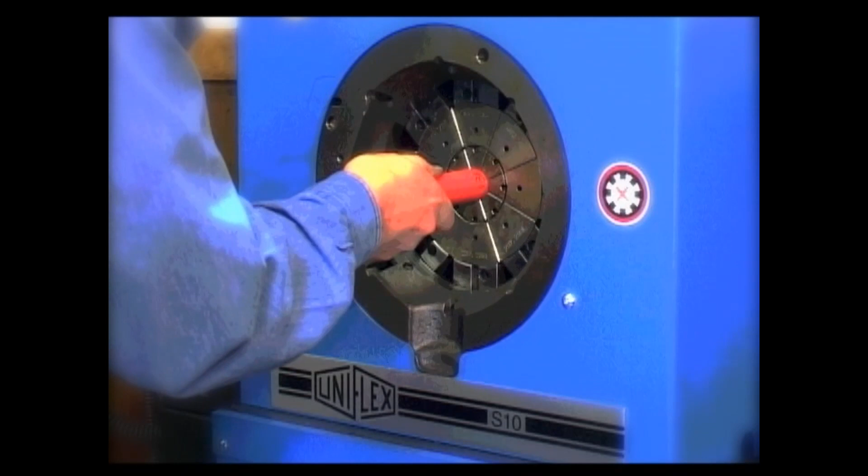As you're well aware, the use of ferrules and sleeves as an attachment method for industrial hose is becoming very popular, in great part due to the success of our Crimpnology program. Crimpnology is a term that we came up with to simply describe all of the technology involved in crimping: the design of the fittings, the ferrules, the sleeves, and the processes to put it all together.

This short video is going to show you how very simple those processes are, and that by using those processes, you can build a repeatable, measurable, performance-oriented hose system as opposed to a hose assembly.

Let me introduce you to some of the people that are going to help us with this video. Jeff Craig is Campbell's Vice President of Sales and Marketing, and he's going to describe some of the features of hose systems. Our hose systems specialist, Titus Jumper, is going to walk you through the actual process of crimping by crimping several assemblies. And Dave Riley is going to show you some special situations you may run into while crimping. Dave is in inside sales, and we like to call him the crimp doctor because he's available to you 8 hours a day, 5 days a week with any of your crimp questions. Let's get started with Jeff.

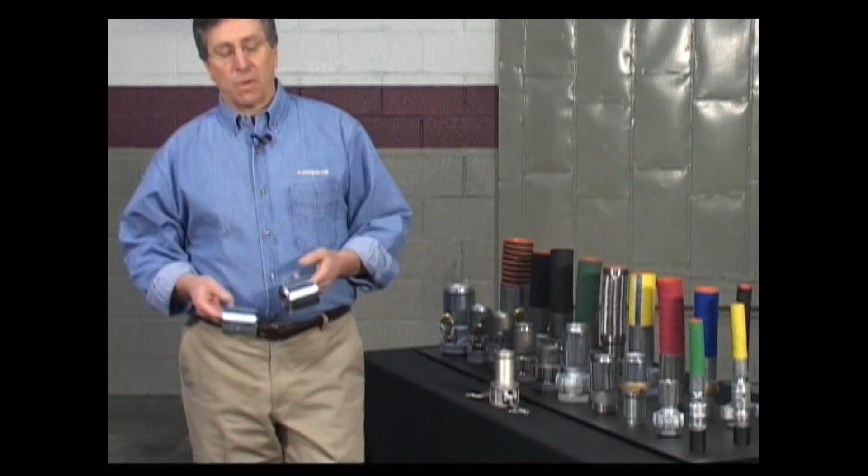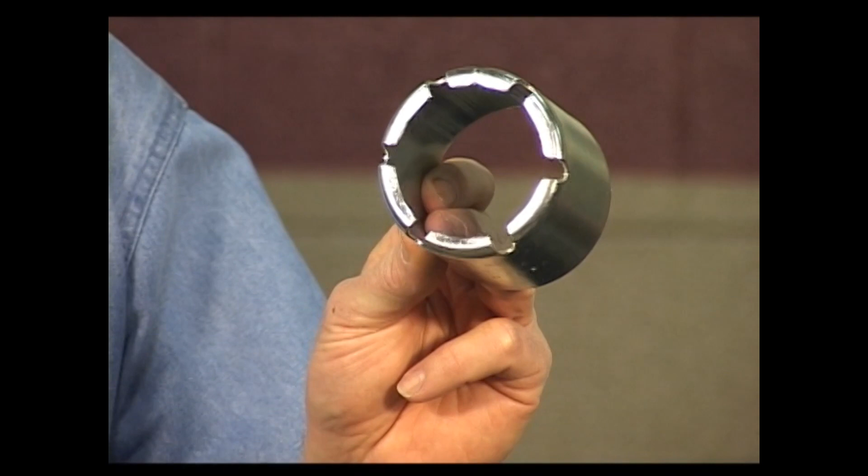There are three basic elements to a hose system: ferrules and sleeves, fittings, and the hose. Let's start with the ferrules and sleeves. The sleeve is basically just a piece of tube. It's cut to length and sized. A ferrule is just really a sleeve with an attitude. It's got a turn-in at the end and slots. Now that turn-in allows the ferrule to grab a hold of the interlocking collar on the fitting and make a mechanical interlock. The cutouts here just really allow the metal to flow as the crimper comes down on it.

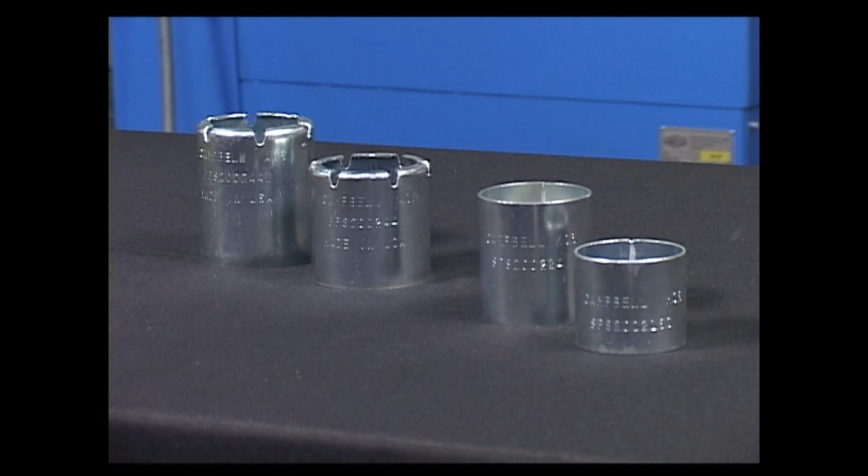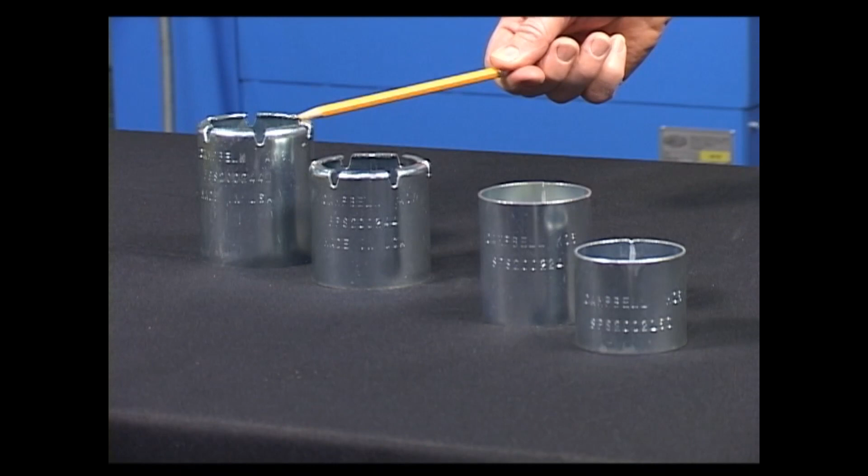The important thing is that whether it's a sleeve or a ferrule, it has to be compatible with the shank on the fitting. In Crimpnology, there are a lot of different sizes of ferrules and sleeves, but only two basic lengths. We have a standard ferrule and a long, a standard sleeve and a short. The length of the sleeve or ferrule should match the shank length of the fitting.

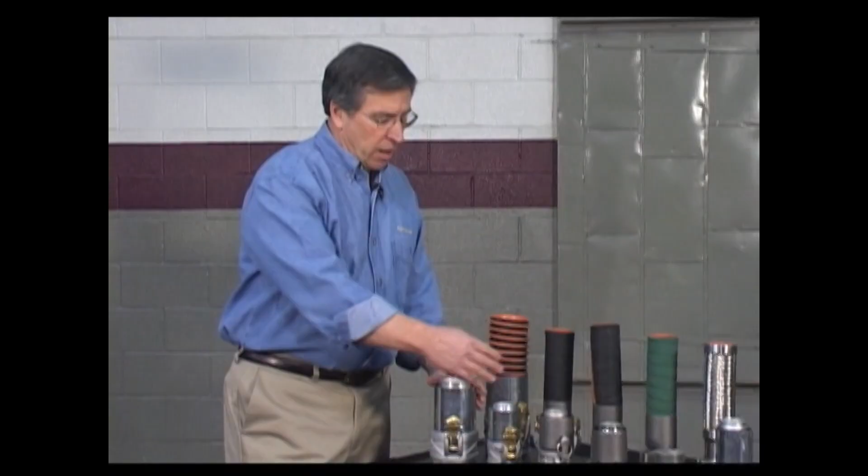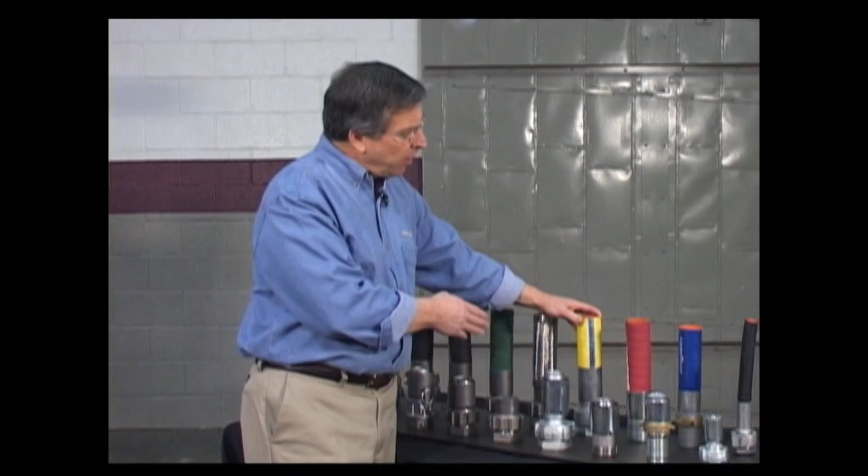When we get down here, we've got a ground joint coupling crimped to a 1,000-pound air hose. Higher pressures, higher temperatures, hence a longer shank, a longer ferrule. At the other end of the fitting food chain, we've got a suction hose coupling, low pressures, low temperatures. We use a short shank and a short sleeve.

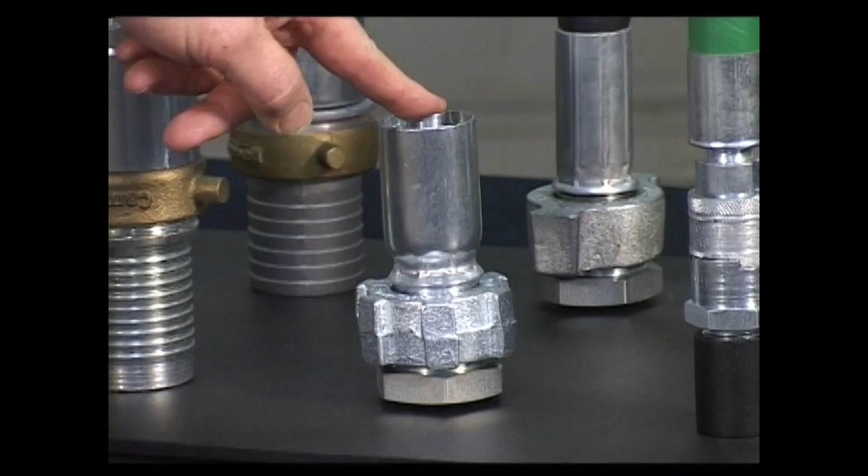Now this is a whole different animal. It's a crimp steam hose coupling. Because of the high temperatures and high pressures, plus the thermocycling that they operate under, we designed each of these around a very specific manufacturer's steam hose. And here we have the light duty ferrules that are designed around utility hose such as water, air, and nitrogen.

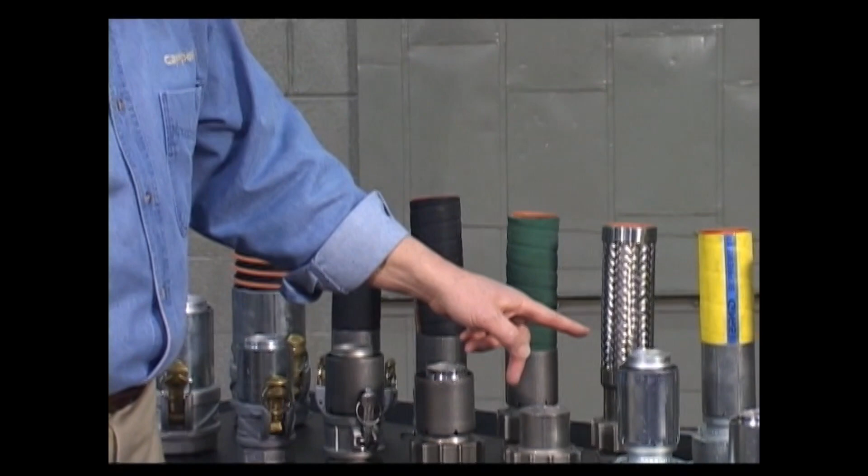Now one thing you'll notice as you look at these, in each case, the shank of the fitting stands just a little bit proud of the ferrule or sleeve. We do that on purpose. When you crimp, the material in the ferrule or sleeve will stretch slightly, and we allow for that so it grows to be the exact length of the shank.

One more thing. Let me illustrate what happens when you use an incorrect length of ferrule or sleeve on a fitting. What I'm going to do is take the long ferrule, put it on a shorter shank, and a short ferrule on a longer shank. Now in neither case is the hose correctly supported. In this scenario, as the hose moves, because the tube's not supported, it's going to wear on the tube, and that can result in premature tube wear and even a failure.

In this scenario, exactly the opposite. Now the cover's not correctly supported, so as the hose flexes, it allows the ferrule or sleeve to cut into the cover. That can result in premature wear of the cover, or again, a failure. It's critical that the ferrule or sleeve and the shank are compatible.

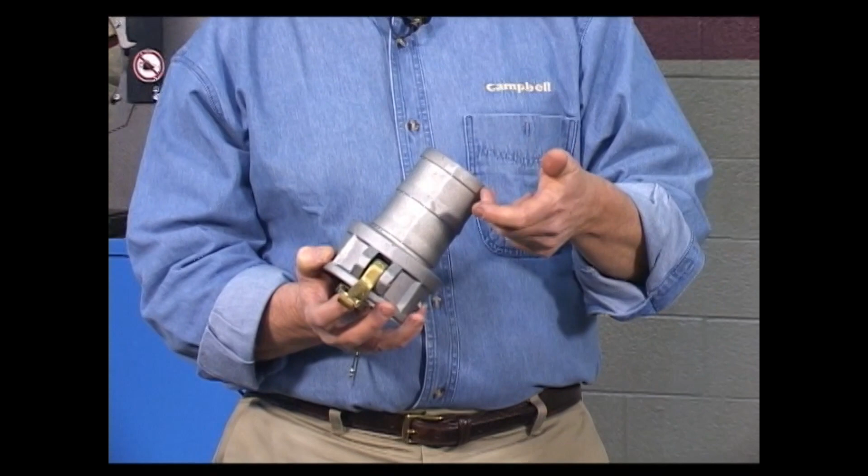Just as length of ferrule and sleeve is critical, so is shank design. This is a classic two-bump shank, designed to be used with band clamps. The two bumps locate a clamp in the center, the clamp at the end of the shank. Good for clamping, but less than ideal for crimping.

Why? When you crimp a ferrule or sleeve down on this shank design, most of your pressure is exerted on only two areas. It's a 3-inch shank, but there's only 1 inch of raised portion, and that's where the pressure is exerted. It can cause 3 problems. The first could potentially damage the tube. The second is sealing issues, and the third is hose retention.

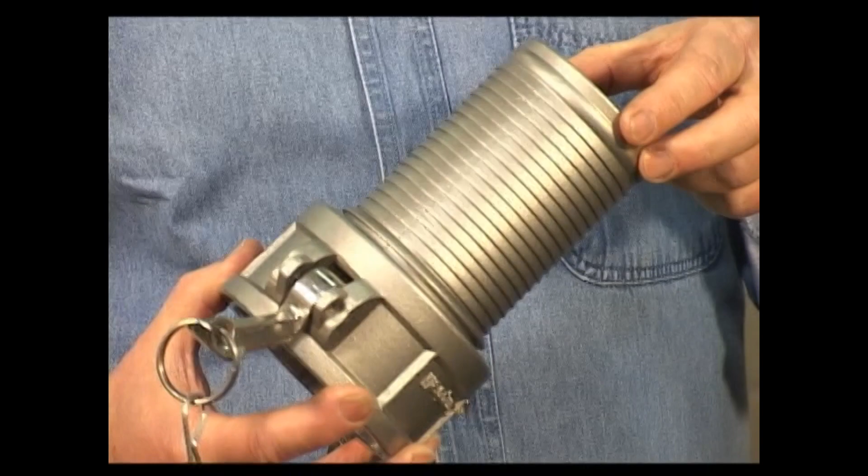The ideal shank for crimping has multiple serrations, all the same height. This allows the ferrule or sleeve to exert its pressure evenly over the entire shank, which is ideal for both retention and sealing, and also doesn't prematurely wear the tube.

Jeff described the first 2 elements of Crimpnology, the design and manufacture of our fittings, ferrules, and sleeves, all of which we can control. I'm going to describe the third element, the hose. The hose is the only element we cannot control. As you know, industrial hose has many shapes and sizes, which create issues when it comes to crimping. Given this, how do you establish a safe and accurate crimp specification each and every time you build a hose system? You use the Campbell Crimp chart.

Now there's 3 sections to the Campbell Crimp chart: the table of contents, a procedure section, and finally the spec charts themselves. In the procedure section, you're going to find a lot of important information about crimping, but I'm going to boil it down into 2 simple steps. Measure the hose and use the chart. Again, it's that simple. Now I'm going to get into a little more detail about those 2 steps.

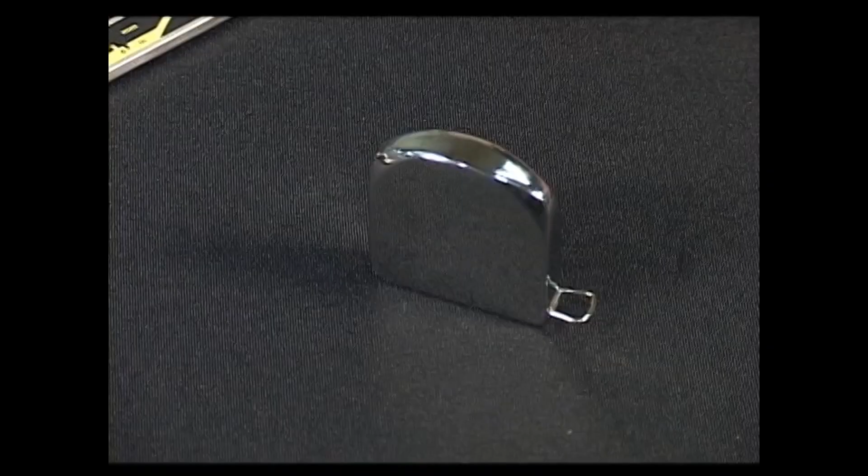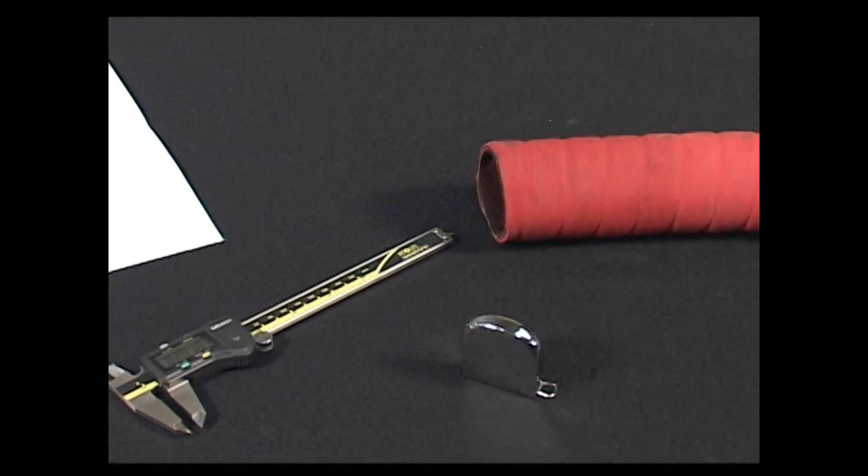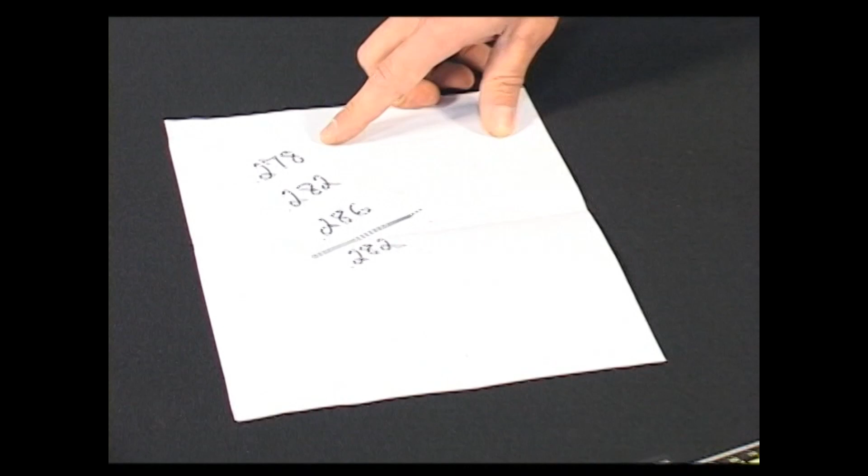You can measure the OD with a pi tape, or you can measure the hose wall with calipers. We suggest the hose wall method because it's more accurate, and we explain this later in our FAQ section. Industrial hose ODs can vary dramatically, so when measuring the wall, we suggest taking 2 or 3 simple measurements. In this case, our measurements came to 278, 282, and 286. Now in your head, come up with a rough average. In this case, it's easy. It's 282. Now let's go to the chart.

Here you're going to see an example of a page in our crimp chart. The highlighted section shows the couplings by name. This next section shows those same couplings by part number. In this column, you're going to see many of the different ferrules that are suggested. We took our hose wall measurements and came up with 0.282. Scrolling down this column, we're going to see that that number comes in between 2 different numbers, and that's okay. We're going to use 281, the closest number.

And here you'll see that we connected the column with the row to get our suggested ferrule. Just to the left, you're going to see our crimp diameter. So by taking the hose wall measurement and using this chart, we've identified both the ferrule and the crimp diameter. So now let's crimp some hose.

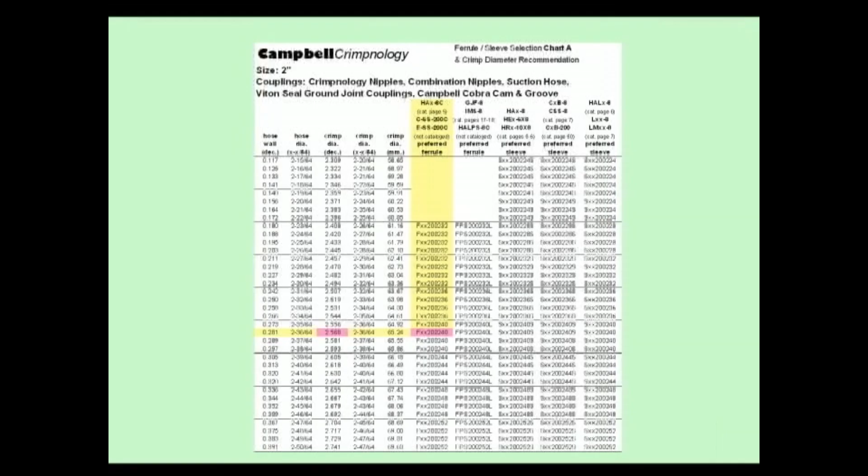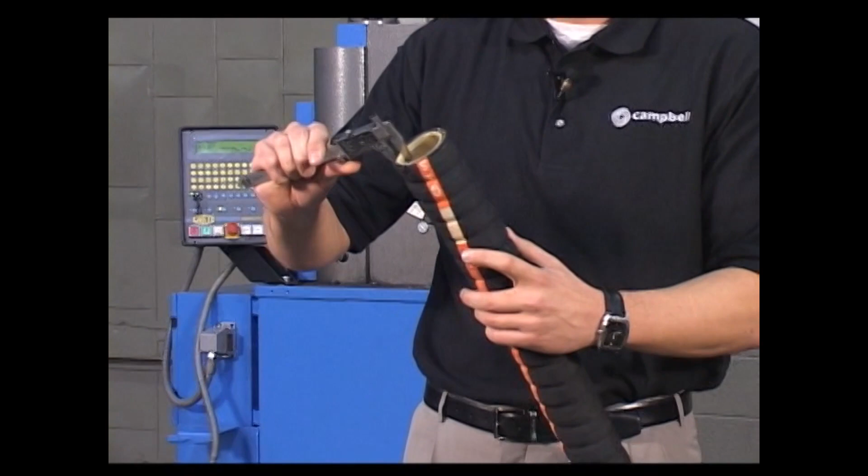First, we're going to start with 2-inch chemical hose using a 2-inch Campbell Crimpnology nipple. I went to the table of contents in our crimp chart. It directed me to page number 15. First and foremost, and most importantly, we're going to take a couple quick measurements of the hose wall, avoiding any wires that may stick out or cuts in the wire, and I'm going to get a quick average of that.

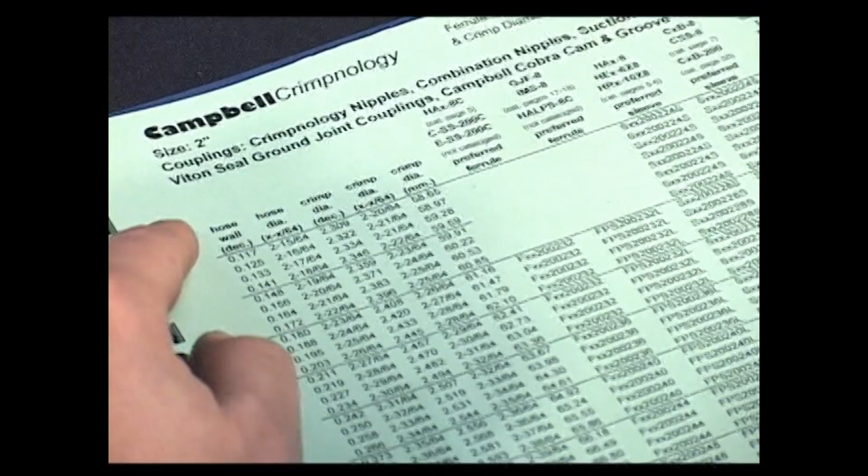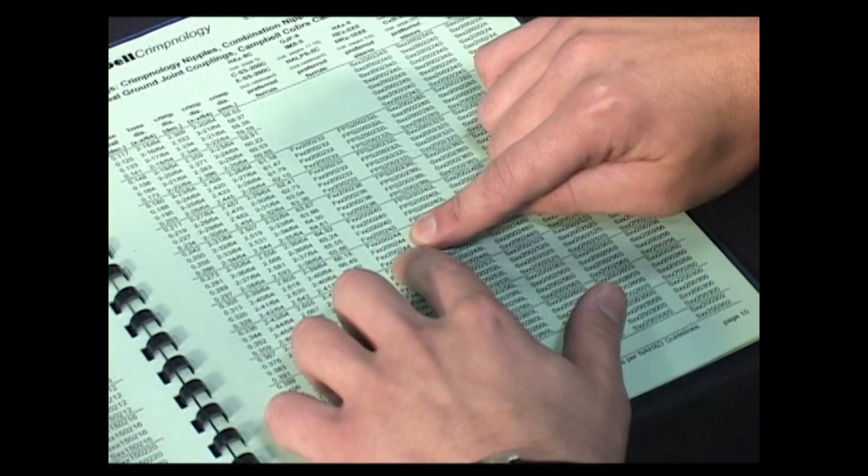I'm going to go to my crimp chart. We're going to go to the hose wall column and finger down to the hose wall measurement we just got. At the top, you'll see the fitting that we're going to be using, and we're going to scroll down to the recommended ferrule to be used. You'll see just to the left is the crimp specification that we're going to use.

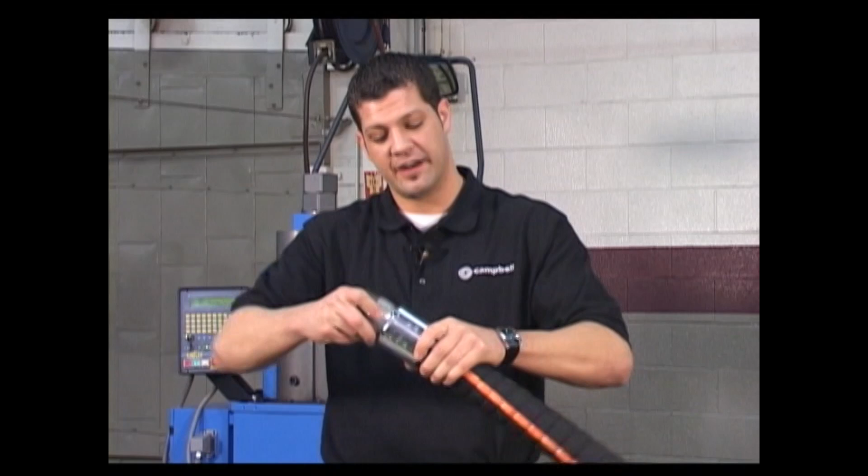Now we're going to assemble the hose. First by putting the ferrule onto the end of the hose and inserting the fitting into the hose up to the last serration, and then allow the interlock to come onto the fitting itself. Now we're ready to crimp.

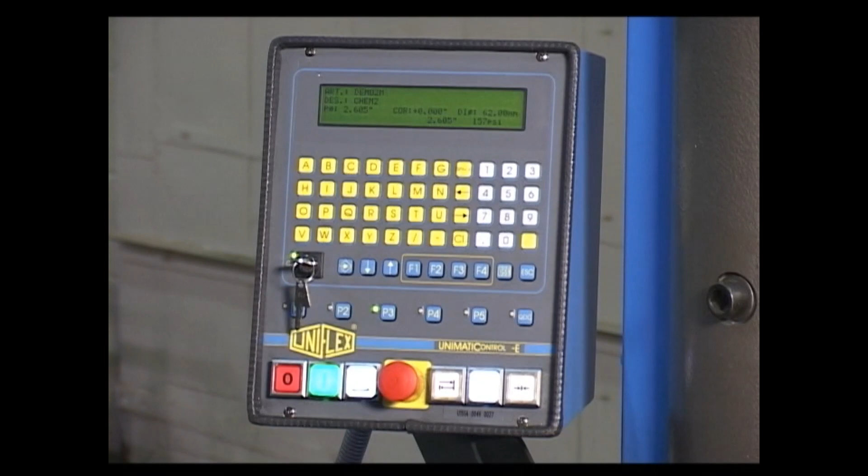We're here at the Uniflex 380i. I've programmed the machine to the crimp spec that we've gotten. It has automatically told us to use a 62 die, which we've installed. I'm going to feed the machine, laying the ferrule on the bottom die. Using the mirror, I'm going to line up the back of those dies to come down on that ferrule for the interlock.

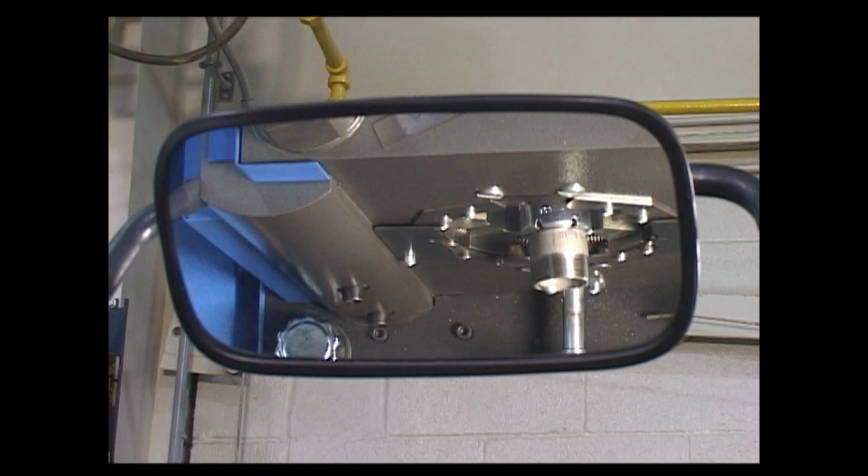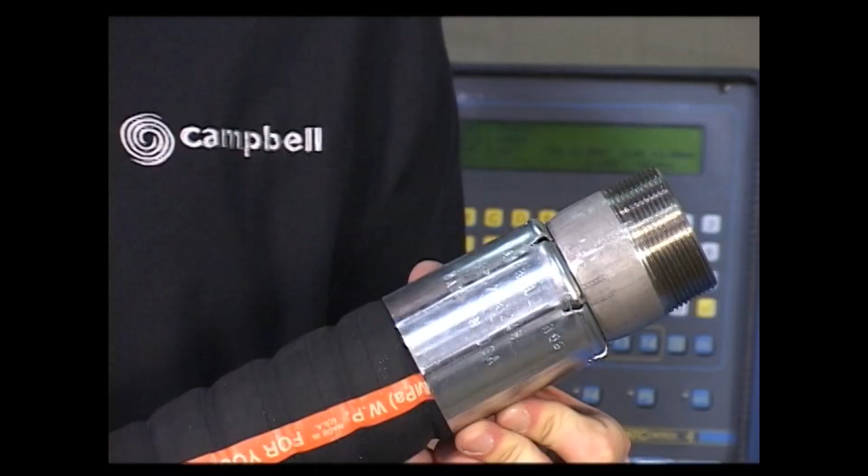Okay, the last part, or last step in our process is to take a measurement. We're good. And what you have here is a repeatable, measurable, performance-oriented chemical hose system.

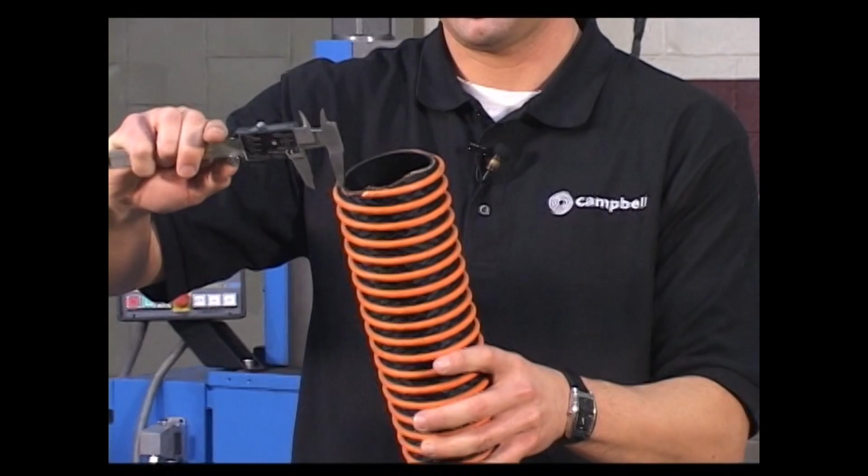Now we're on the 3-inch petroleum drop hose using a Campbell 3-inch Cobra cam and groove. First, I'm going to start by measuring the hose wall, in this case getting over the largest parts of the helical wires. Now I'm going to go to the crimp chart. Find my hose wall and the appropriate fitting and follow these across to the sleeve recommended. Just to the left, we find the crimp specification we're going to be using.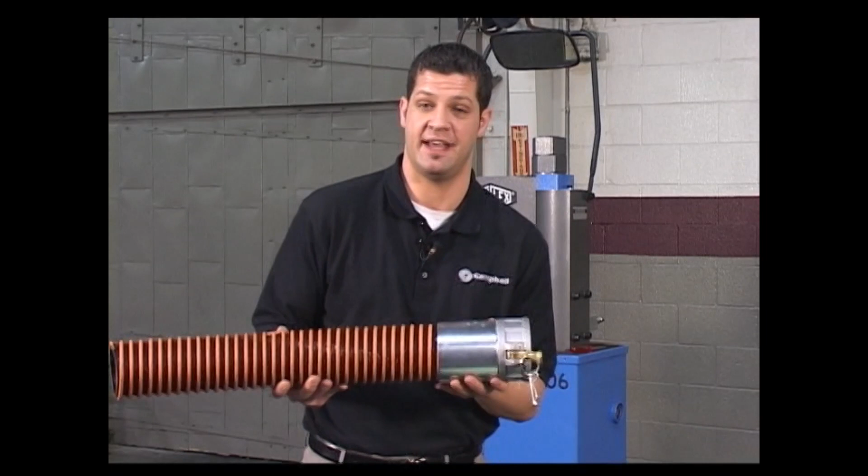Now we're ready to assemble the hose. Now that we have the hose assembled, I'm going to take the sleeve, slide it down till it butts to the end of the cam and groove. Notice we did not use a slinky in this, but now we're ready to crimp. I've entered the crimp specs into the machine, and now I'm just finishing up inserting the dies.

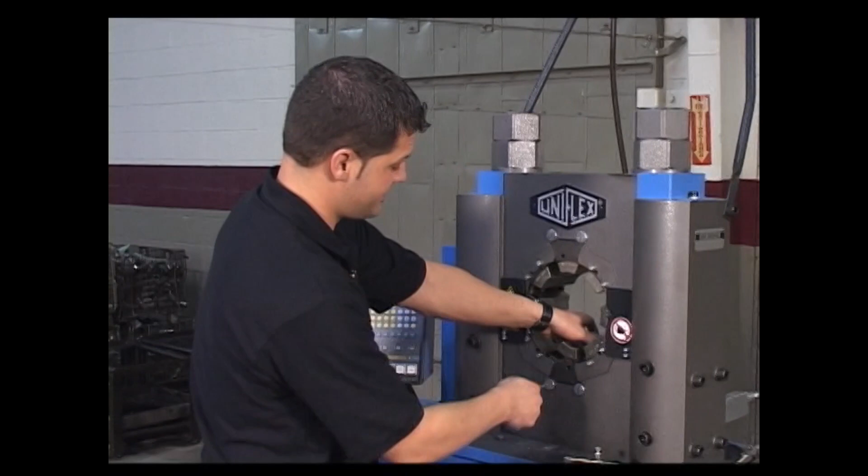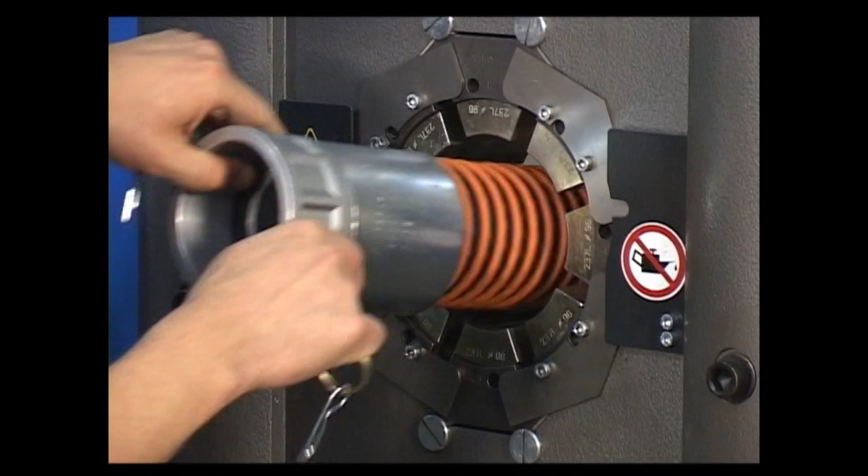I'm going to feed the machine, holding the handles. I'm going to line up the sleeve to the end of the dies. I'm going to jog it down slightly and then crimp it fully. And there you have it, a simple process and a perfect crimp.

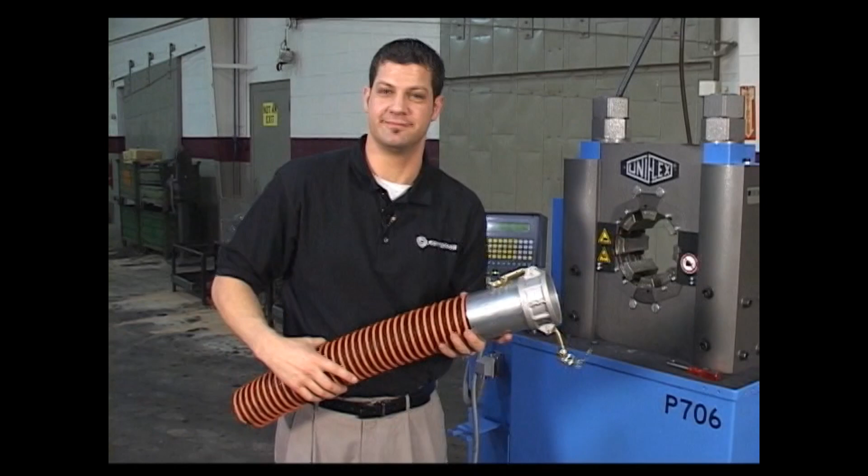Now we're on the 2-inch lay flat. We're going to be using aluminum pin lug coupling with this. Now lay flat's a little bit different because of the thinness of the hose itself. So we're going to ask for 2 different measurements on this. We're going to ask for the measurement of the hose wall and the measurement of the fitting itself over the serrations, the OD of the fitting.

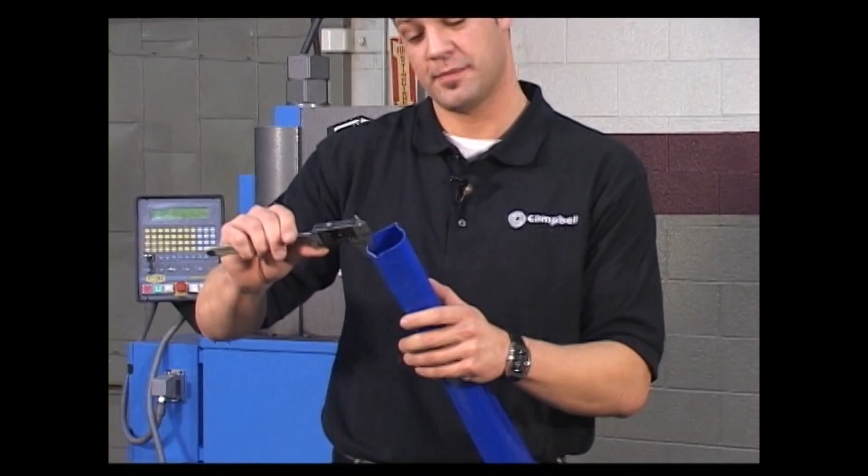I'm going to first start by taking the measurement of the hose wall, and now the measurement of the fitting. Now that we have those measurements, I'm going to turn to the crimp chart, find my average fitting diameter over the bumps of the fitting, and my hose wall measurement, and follow that down to my crimp specification. I'm going to take that over to the appropriate sleeve to be used.

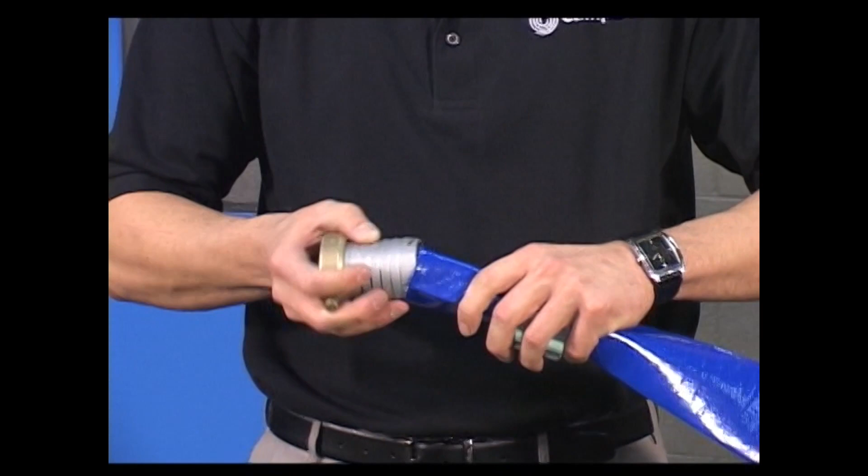Now we're ready to assemble the hose. First, I would start by folding the hose over, putting the sleeve on, and inserting the fitting. Take the hose up to the end of the fitting, but allowing just enough area for the pin lug to turn. Now we're ready to crimp.

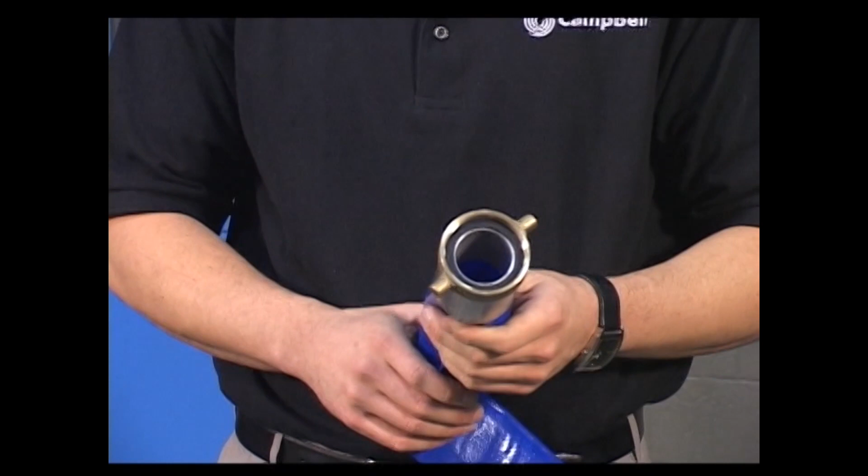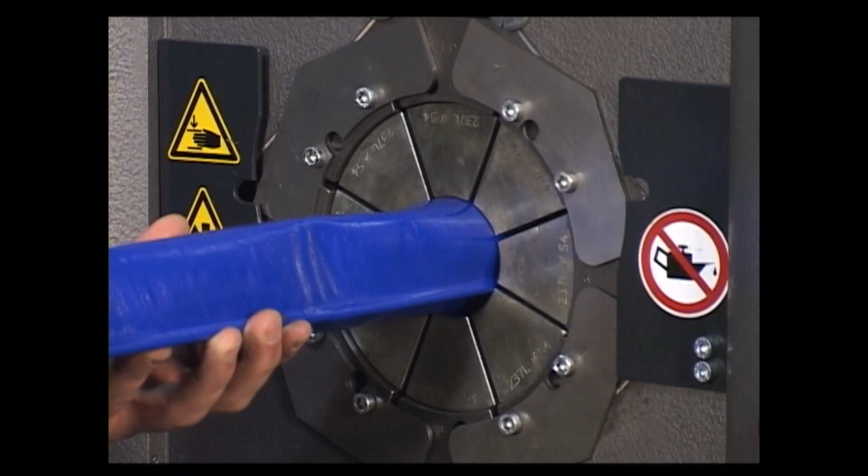All right, we're all ready. The machine's set up, the dies are in place. With this one, we're using a backstop to the machine, so let's see how it works. And there you have it, a leak-free, lay-flat hose system.

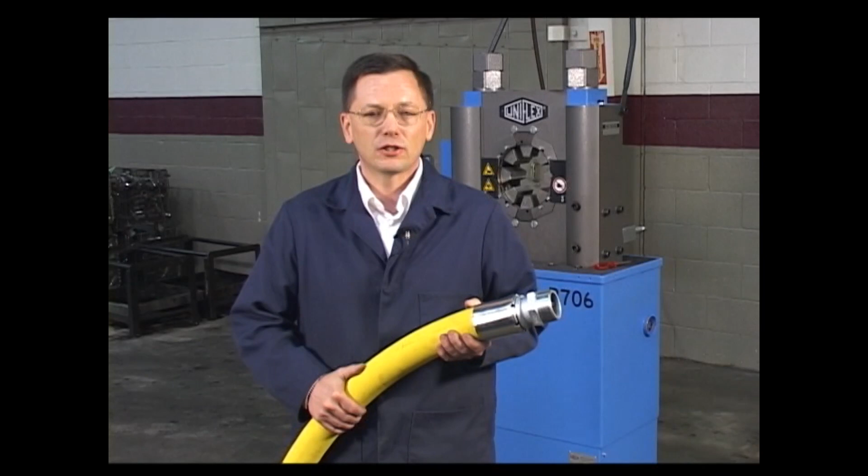Hi, I'm going to talk to you today a little bit about some issues that you may encounter while you're crimping. For a more realistic scenario, let's think of it as Friday afternoon. One of your best customers calls up and requires that he has an assembly manufactured and shipped before the end of the business day. You get your crimp chart out and figure out what you need, but you find that you're missing the ferrule you require. All right, the only ferrule that's available is 2 sizes too large. Do you think this assembly can be manufactured? Absolutely. I'll show you how it's done. Let's go to the crimper.

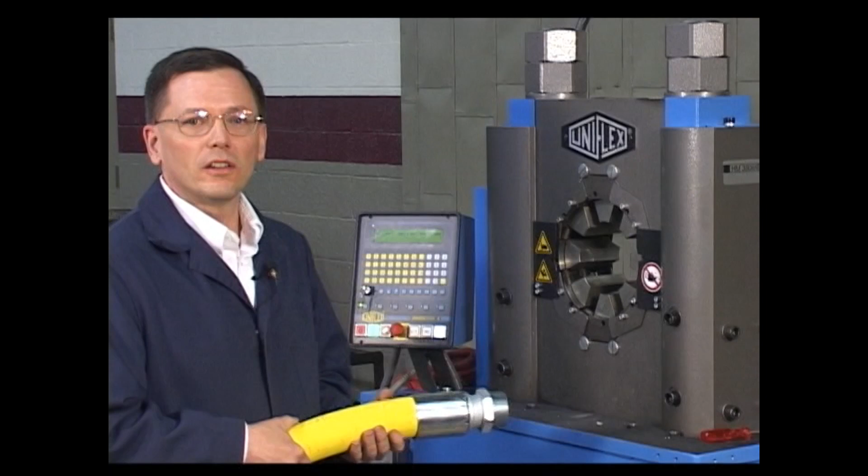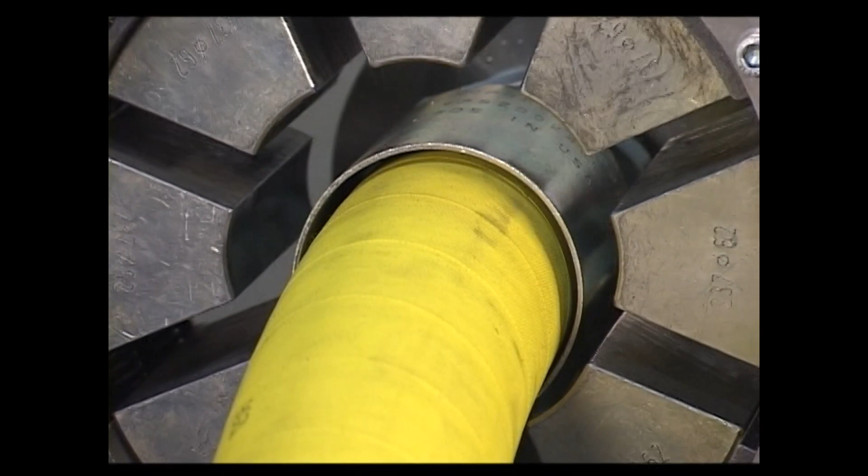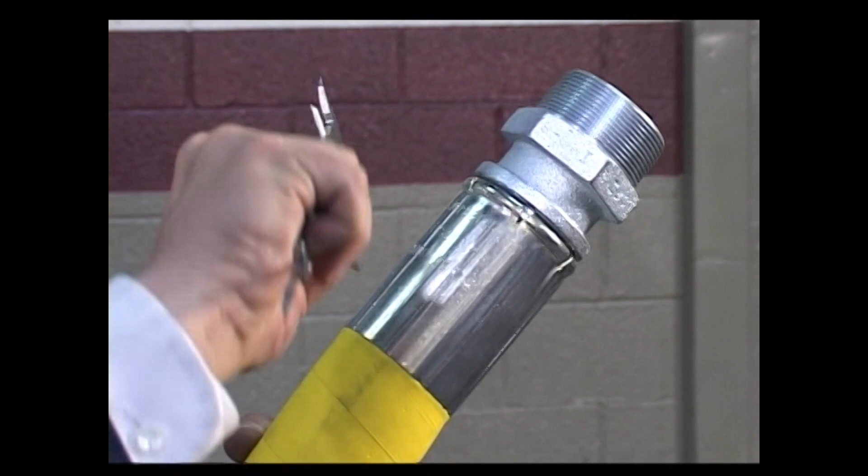I've had the dies installed in this machine as well as the crimp data. I'm going to put the part into the machine, line it up. All right, what we want to do is ask the machine to crimp. And we just want to crimp until we see some of the steel start to migrate between the die segments. And then we want to rotate the assembly, putting the ridge lines or the high points of the ferrule in the middle of the die segment and ask it to crimp again. All right. And we're good. Another measurable, repeatable hose system.

I'd like to review one more situation you might encounter. And this time we'll go back to that same Friday scenario. All right, you have all the correct parts, but you don't have the right dies. Do you think you can make the assembly? Absolutely. Let's go over to the crimper, I'll show you.

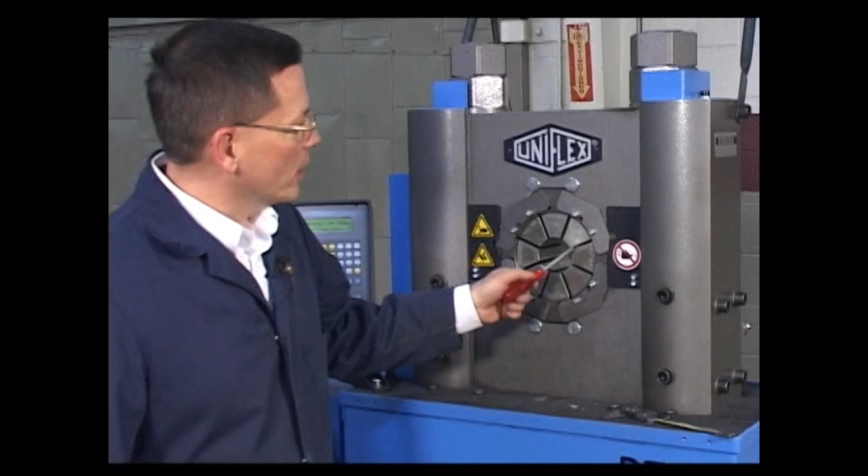I've set up the crimper with a die that is 3 sizes smaller than optimum, and I've closed it to the recommended crimp diameter. As you can see here, there are gaps between each die segment. If we were using the correct dies, there would be no gaps in this area. All right, let's do some crimping.

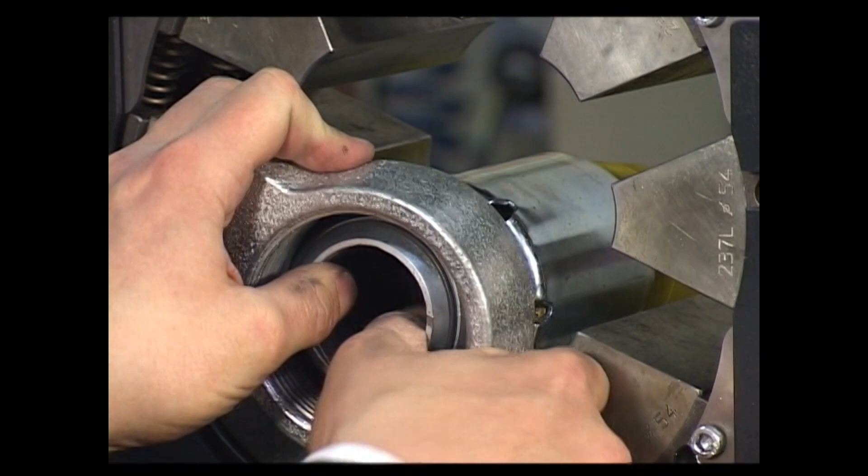I placed the hose into the machine, and I asked the machine to crimp until it meets some resistance. And then I'm going to open the dies up. I'm going to spin it, and then ask to crimp again.

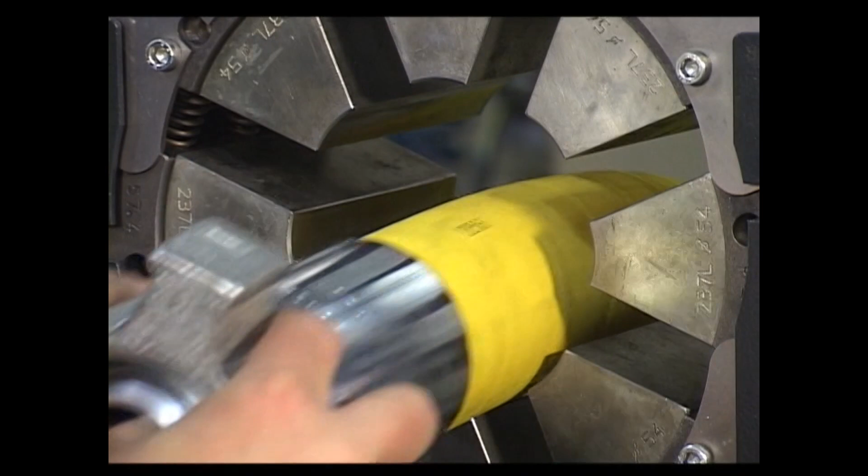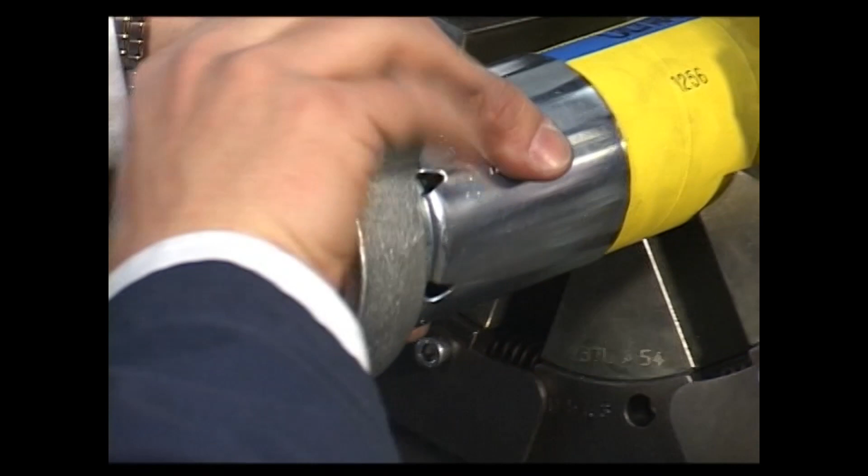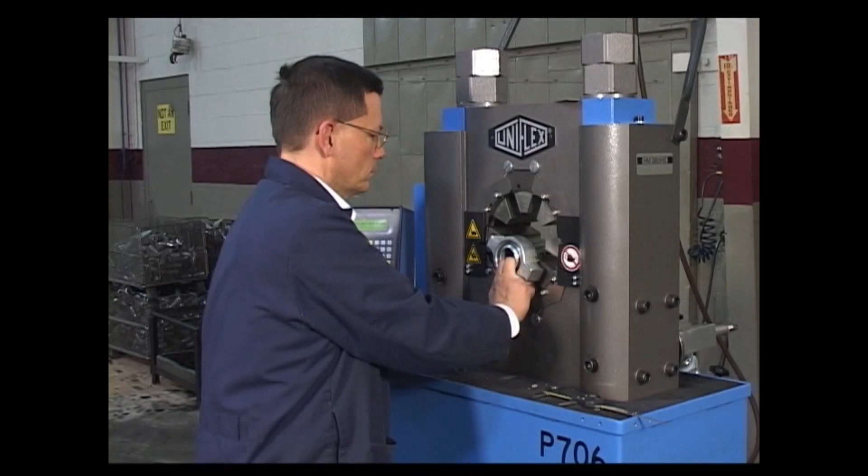All right, I'm going to open the dies up, move it again, just to give it the high points that you may or may not see here on the collar. I'm putting it in the center of the die plate or the die segment to actually move the ferrule around the outside of the hose. Perfect. Another measurable, repeatable hose system.

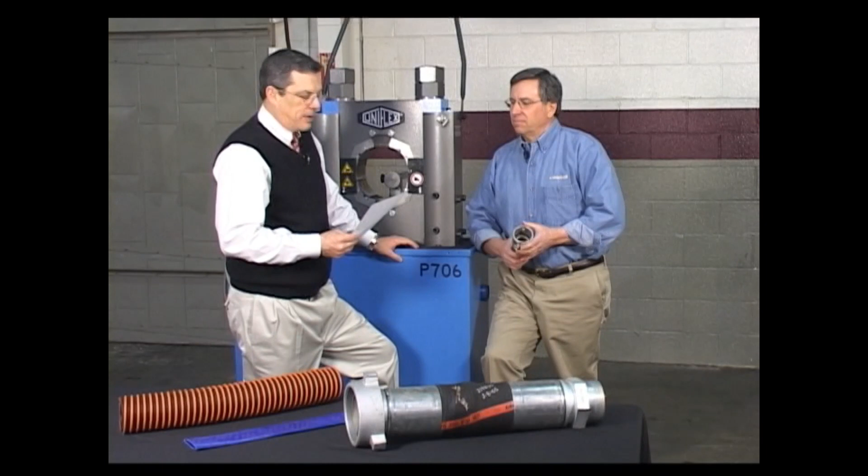Jeff and I have done rather extensive traveling around the country, visiting with our distributors, discussing and demonstrating Crimpnology. And in those travels, we've come up with 5 or 6 of what we would call the most frequently asked questions. By far, and number one, the most frequently asked question is, can I use Campbell ferrules or sleeves on another brand of coupling, or vice versa? Is that possible, and can that be done?

Well, obviously, as Campbell's sales manager, I'd prefer that our customers didn't use other people's product. Right. But we recognize that there are going to be times, whether it's because of a spec or an emergency, you're going to have to do that. So the answer is yes, you can. What you've got to bear in mind is that when you use our products, it's a system. When you use other people's products, it's an assembly, and I'll explain why.

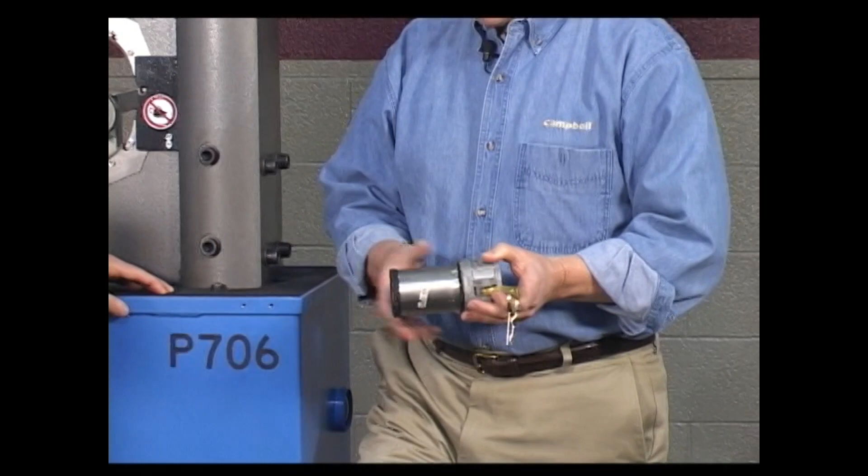This is actually a coupling and sleeve that one of our customers sent us. He had to get it out. He basically used our crimp spec with other people's components. Their sleeve is a bit thicker, and the shank of their fitting's a bit thicker, and neither of those variables was taken into consideration. So it actually caused him to over crimp this, and it actually crushed the shank. So he's using a crimp chart that's designed to our coupling and our ferrule on somebody else's? Exactly. And those differences made the difference in terms of crushing it. He went back to an assembly as opposed to a system.

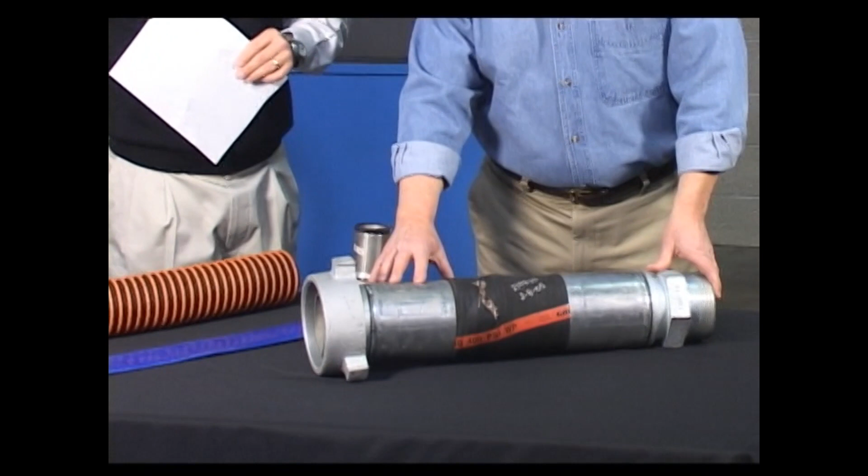This is an example of a system. It's a 4-inch bull air hose. It's actually a 400 PSI hose that we blew in a test at 2198, almost 2200 PSI. But again, it's our shank, we know the dimension. It's our ferrule, we know the dimension, crimped to our spec. Consequently, it's measurable and repeatable. And what that means is not only is this system measurable and repeatable, the pressure rating is repeatable under test.

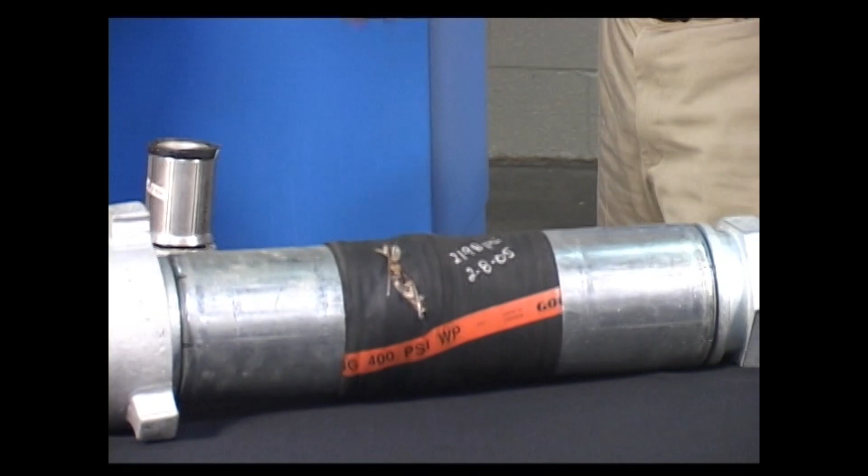So if somebody wanted to use our ferrules and sleeves with someone else's coupling, they could call us and we could walk them through the process to crimp that properly, but you would not get the system. You'd have a good assembly, but you wouldn't have the system. Absolutely. Dave Riley has what we call Crimp Chart B, and he can help you through that situation, get you with a system out, or rather an assembly out the door. Very good.

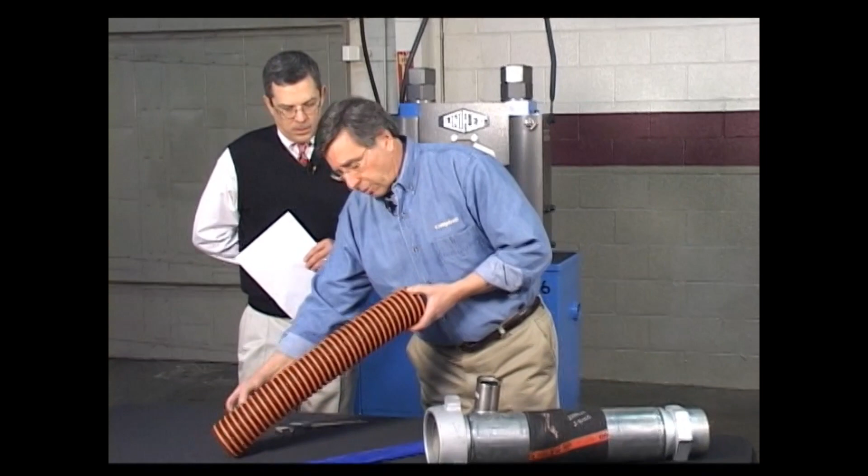Certainly up at the top of the list of questions is, why use the hose wall measurement as opposed to an OD? I've got a fittings or a hose catalog sitting here. It's listing an OD. Why can't I just use that OD and go to my crimp chart? There's 2 primary reasons. The first and most obvious is there's some hoses out there that are just really hard to put a pi tape around, lay flat being one. Another would be any kind of a hose that has a wire helix. It's basically got hills and valleys. When you try and run your pi tape around it, you tend to go over the hills and into the valleys, so you get an inaccurate reading. With both these hoses, going with the dial caliper gives you a very easy reading of the hose wall.

Another reason is when you determine a hose wall using the OD, you're assuming the ID is correct. And there are a couple different reasons why that may not be the case. Just the vagaries of hose manufacturing mean just as the OD can vary, so can the ID. Also, there's a lot of import hose now, and I suspect that that's metric IDs, and we're simply assuming or taking it to the closest imperial measurement. Okay, good.

Why use, or when should I use a sleeve versus a ferrule? Is there a rule of thumb? Is there a technical reference I can go to? How should I determine that? Both. There's a rule of thumb and there's a technical reference. Let's start with the rule of thumb.

If you're at all worried about what's going through that hose, and by that I mean the media, the temperature, the pressure, any of those STAMP variables that you use when you put the components together, I'd say go with a ferrule. That mechanical interlock you get is an insurance policy. The extra retention that it produces is going to simply take into account that the temperature might go up, the pressure might go up, the media may get thicker.

Low pressure applications where temperature is not an issue, gravity is typically the pressure, I'd go with a sleeve. Okay. But remember, any sleeve application, you can use a ferrule. And the science is basically on page 30 of our catalog. If you look at that, we have pressure ratings by hose type, by fitting type, and by ferrule or sleeve. And we also have a temperature derating chart on page 30, and that's a critical part, as you know, with STAMP. It has to be factored in.

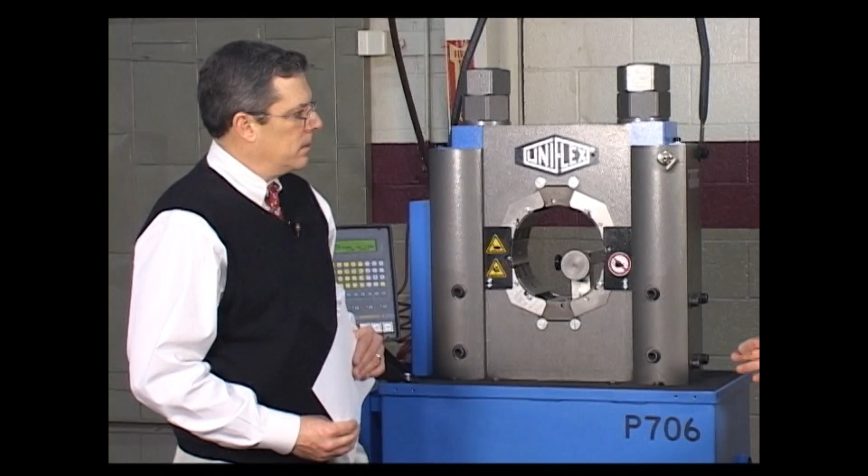Each crimper is a little different, and depending on how the dies come together, how the head operates, some are more die specific than others. Uniflex is very forgiving, Finn-Power a little less so, but they're all a little different. And Dave Riley can provide the customer with a recommended die package for industrial hose. So when they get their new crimper, if they're looking at 2-inch, 3-inch, they can figure out what hose they're using, call Dave, and he can tell them with that particular manufacturer's hose what dies they should be getting.

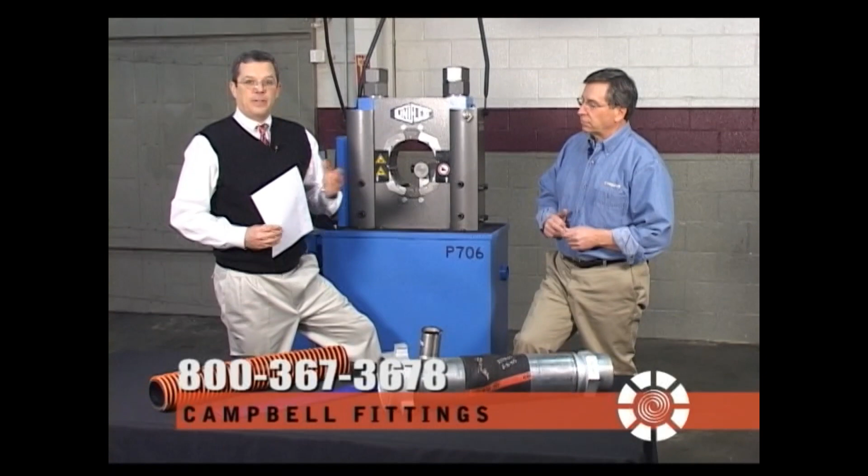If I were to ask you what 2 points you took away from this video, you might answer measurable and repeatable. What I'd really like you to answer, though, is measure and use the crimp chart. This is an incredibly valuable tool. It's very unique. I hope this video has been a valuable tool, and I hope you use it often.